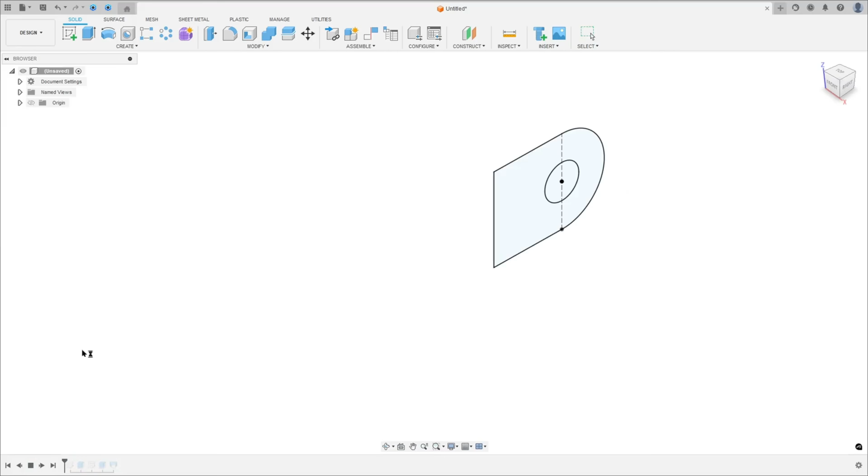Let's make one more exercise in Autodesk Fusion. In this video, you'll learn how to use Extrude and Loft. So open Fusion and let's go.

The first step to create this part: we'll select the right plane and make this sketch. Here will be the midpoint, so we'll make this circle with 2 millimeters of diameter, create this arc with 2.5 millimeters of radius, and create this rectangle with 4 by 5 millimeters.

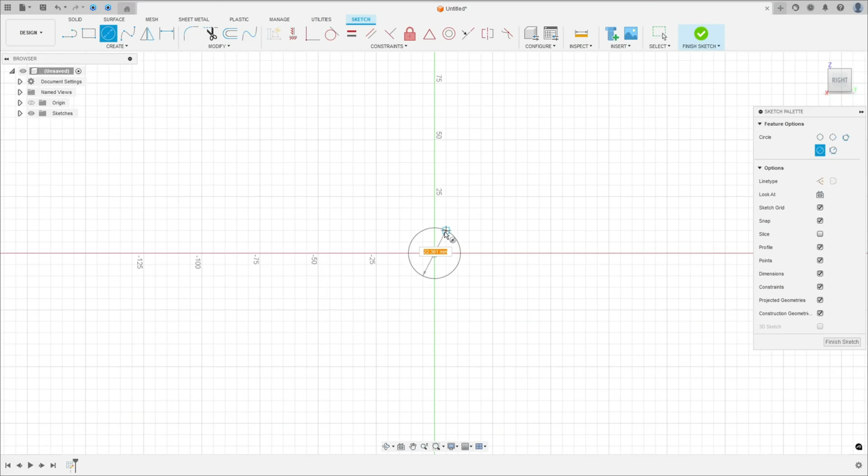Open Fusion, go to create a sketch, select the right plane, select the circle, click in the midpoint, make a circle with 2 millimeters of diameter, press OK.

Now go to create, select arc, center point arc, click in this point, the diameter here, the radius is 2.5 millimeters.

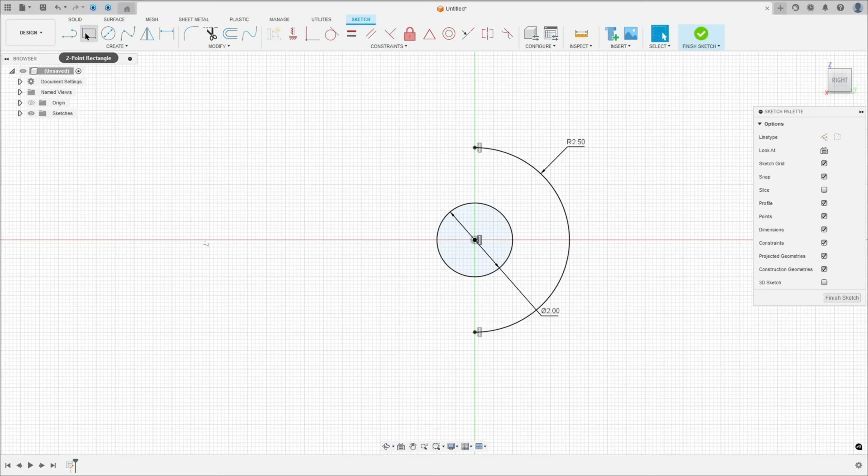Make this arc, go to constraint, select horizontal vertical, select this point and this point, this point and this point. Now go to 2-point rectangle, click at this point, make a rectangle 5 millimeters by 4 millimeters.

Select this line, make this a construction line. We made this. Finish the sketch.

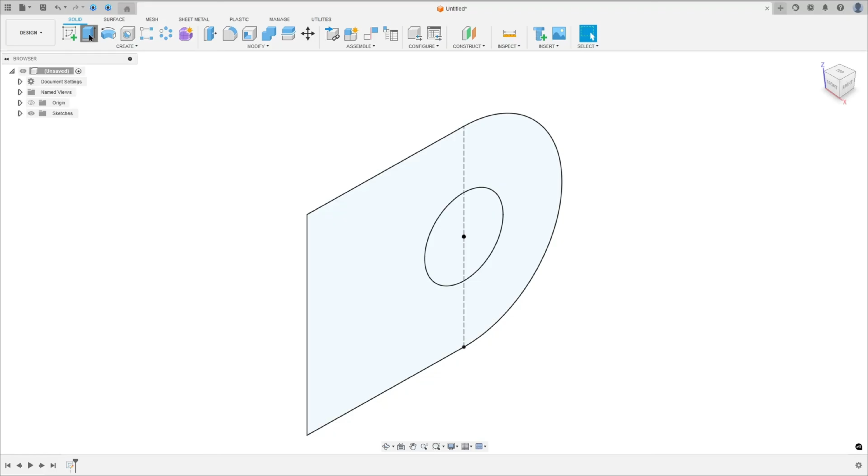Now we need to extrude this 2 millimeters. Go to create, select extrude, select this profile, the direction symmetric, measurement whole length, and the distance 2 millimeters. Operation new body, press OK. We made this.

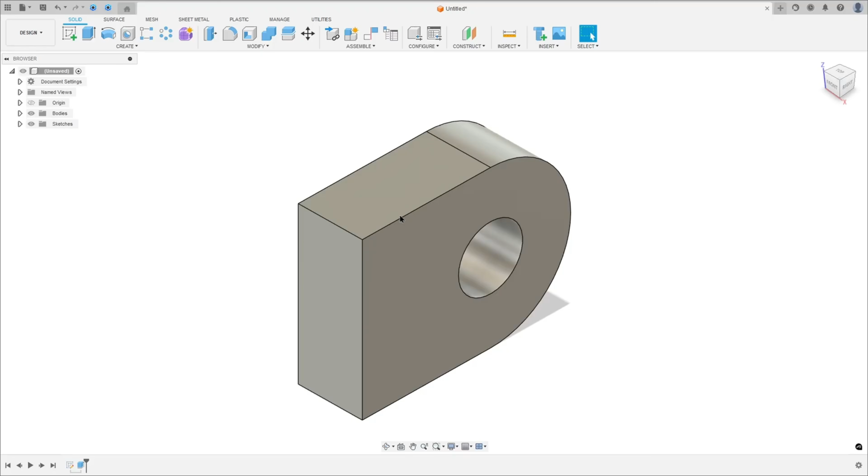Now we need to create this sketch in the top plane, and the distance between the center of this hole and this hole, or the midpoint, is 15 millimeters. Let's create this. Go to create a sketch, select the top plane. Let me rotate this a little bit.

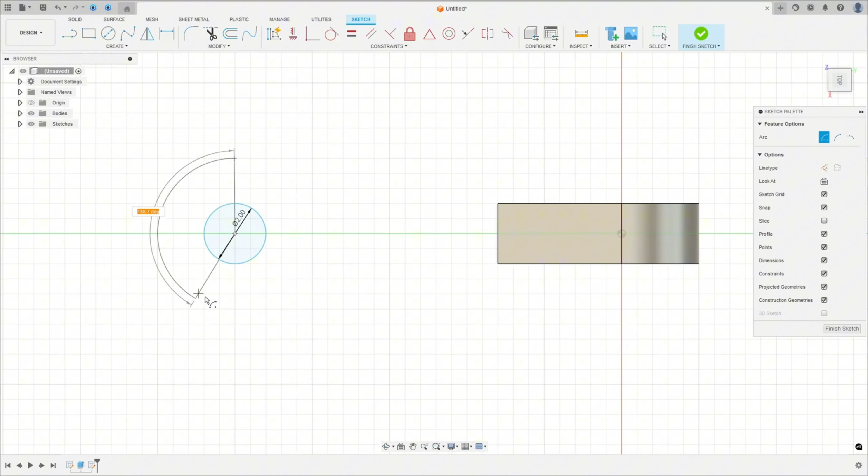Select the circle, make a circle with 2 millimeters of diameter, go to create and select the arc, center point arc, click an arc with 2.5 millimeters of radius. Go to constraints, horizontal vertical, select this point and this point, this point and this point.

Now select 2-point rectangle, click at this point, 4 millimeters by 5 millimeters. Now select this line and make this a construction line. Go to constraint, select horizontal vertical, select this point and the midpoint.

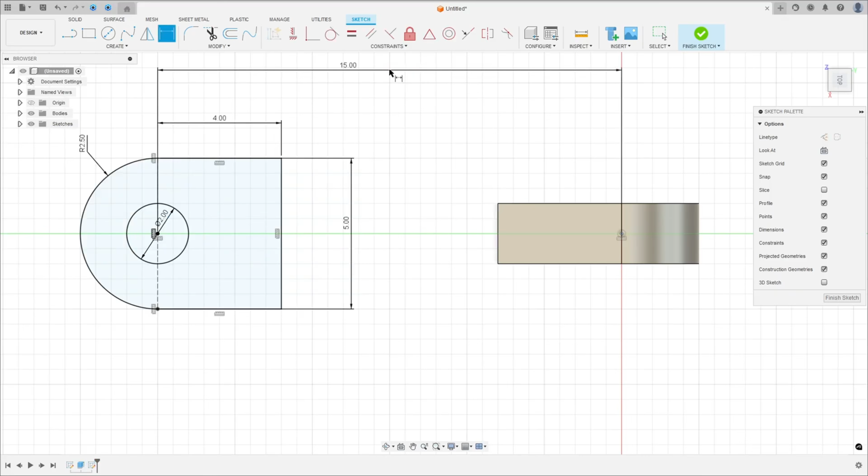Go to sketch dimension. The distance between this point and the midpoint is 15 millimeters. We made this. Finish the sketch.

We need to extrude this 2 millimeters, so select this profile, the direction symmetric, measurement whole length, and the distance 2 millimeters. Press OK. We made this.

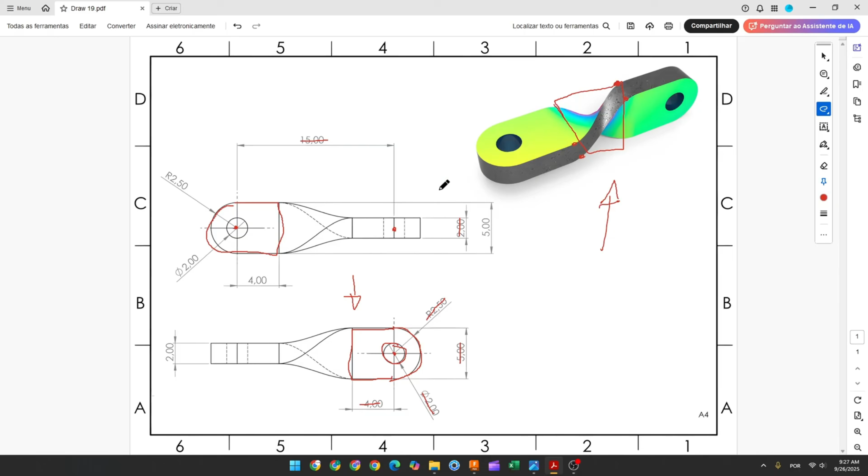Now we'll create this area here. To create this, we use the Loft feature. We know that this edge goes to the other side, this edge to this side, we have a rotation here. Let's create this.

Go to create and select Loft, and for the profiles, select this face and this face, and in the profile, change the connected to tangent and change here to tangent.

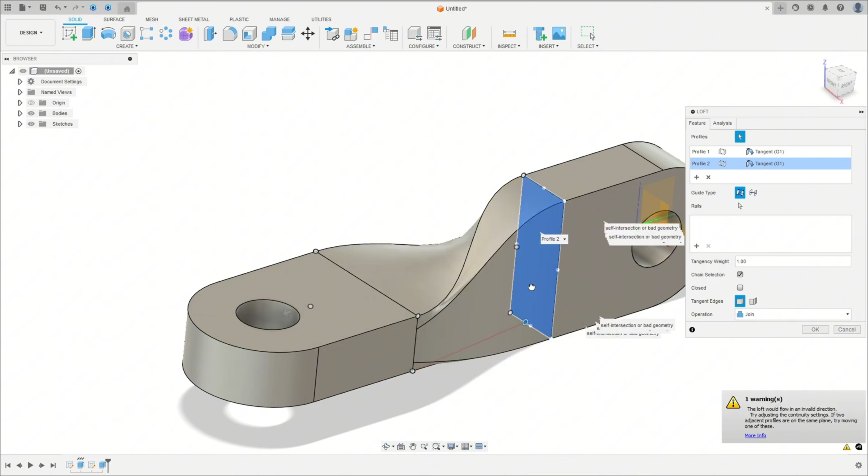We made this. Now we will rotate this a little bit. Let me move this point here. This point will go here. This point here. This point here, and this point here.

Operation join, press OK. We made this. Now press letter A on the keyboard. Let's add some color here.

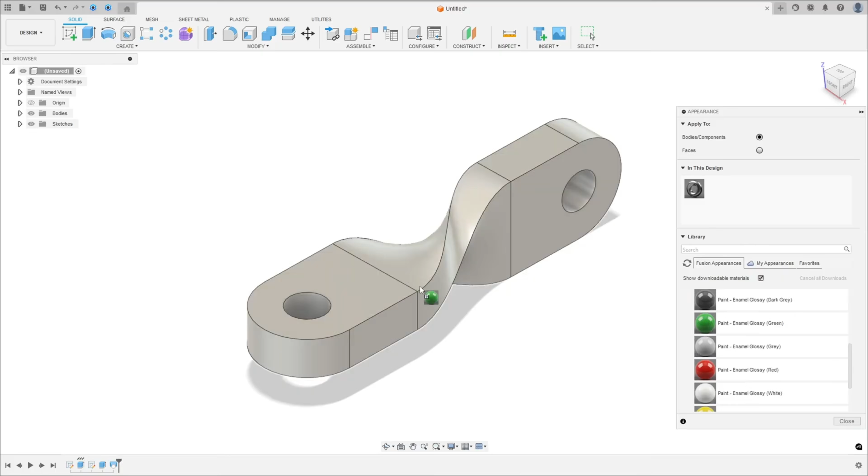Select the faces here, select these faces in the center of these holes. And here will be black.